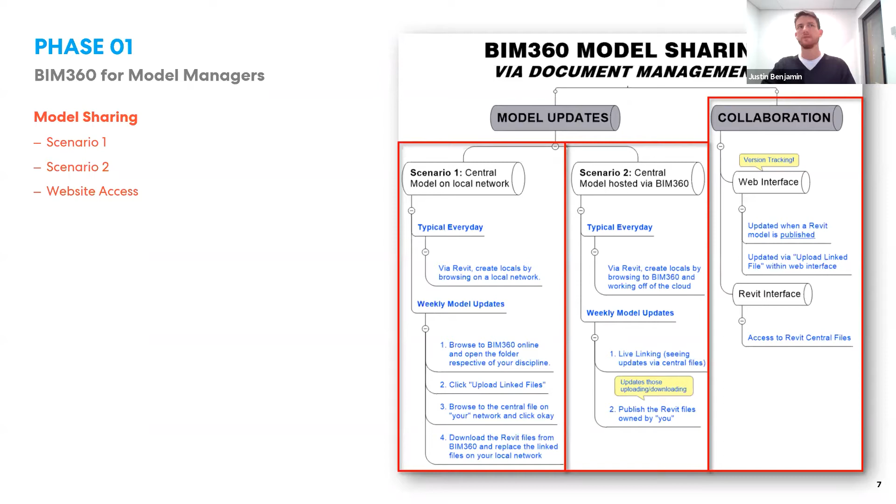Anyway, I got to move on, but there's ample discussion just right here in this window when it comes to the effort it takes to participate in BIM 360 with or without a license. So let's dive deeper: model sharing, accessing the website.

docs.b360.autodesk.com. I think anybody and everybody, even right now, screenshot this. Whether or not you're on a BIM 360 project now, you will likely be on one in the future. And if you are on a project now and you go to this website, you'll see those projects accessible to you. This is a very generic location to BIM 360. Once you sign into this location with your Autodesk credentials, you'll see all the projects that you've been invited to, and you can navigate from that location.

So, look at that. I was invited to some other... there you go. Sorry about that.

So yeah, once you access the website, you shouldn't be overwhelmed. You'll be able to click on the top part of the website. So again, the assumption that you're invited to more than one project, you exit the site first, and then you click on the project that you wish to navigate to.

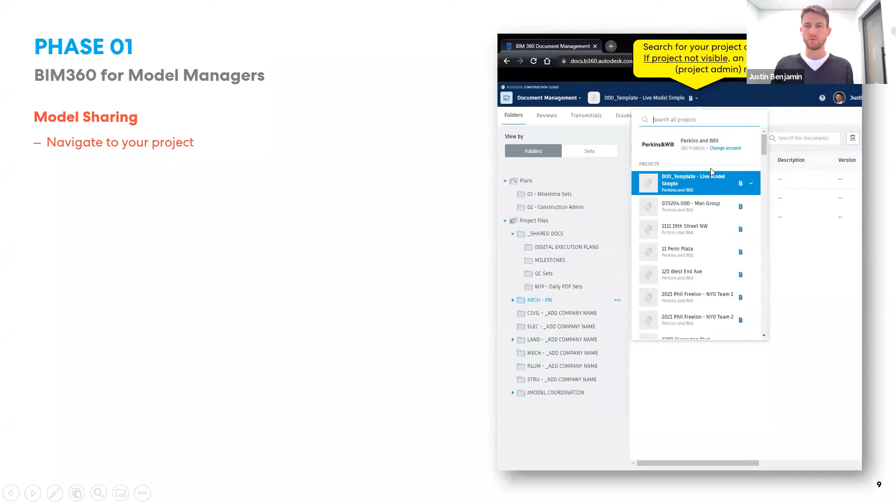Once you click on the project, I'd argue that you want to then select which module you want to access. I'll be focusing exclusively today on 3 modules. And I was told by my boss not to mention some things, when it comes to our subscription versus your subscription, it's really what you want access to.

I would say just make note the document management module is the most critical. So whatever that cost is, you probably want it. The Insight module is, I think, pretty much free, and it's associated to the document management, but I could be wrong, but you might want to make note of that as well as far as the cost impact.

The other module I'll be talking a lot about today is the model coordination module, and I'll say it more than once later on. Those are the three modules that I think you should care about and maybe look into investing in.

To be clear, what I'm not mentioning is the design collaboration module. Write that down, I do not like it, lessons learned. I think that module is a wash, and if it's costly, I say just dismiss it. You can do everything the design collaboration module does manually without the errors, and it's all per user. I'd be game to go deeper as to what I mean by that later on, but don't let them pitch the design collaboration module to you.

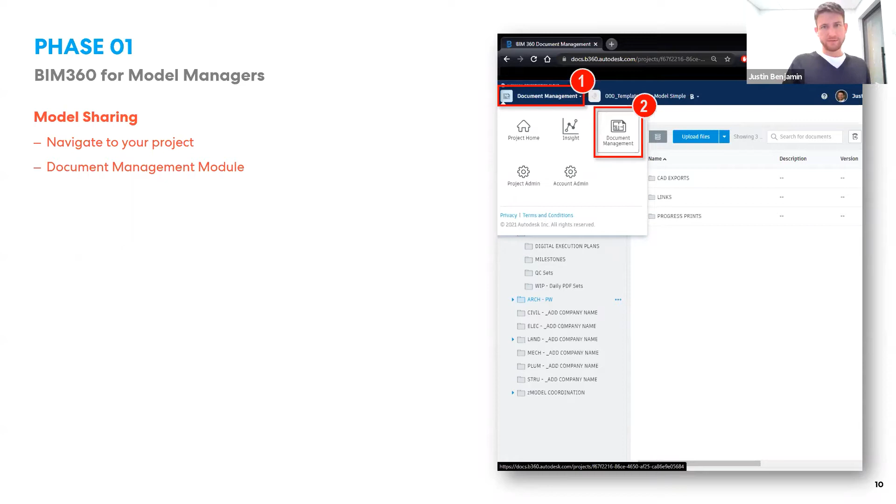Once you're on the document management module, you can have a series of folders. At bare minimum, you're going to have this plans and project files substructure, like Revit categories. You can't rename them, you can't add to them - that's the minimal folder structure of document management. The folders under plans and project files are completely custom to whatever your company wishes to pursue.

For Perkins and Will this is constantly changing. We're evolving, lessons learned as to what we want and how we want to organize content. Under plans, we have a couple of folders ideal for project milestones. They have sets - what a set would be is like PDFs that are sheets common between benchmarks like bid, permit, construction, revision, whatever. You have sets that kind of connect them, so there's this taxonomy that helps you there.

That's plans, but under project files is the beast - that's really where most of the work happens. We have a shared docs folder under project files, which is basically everything but the Revit files. This is where we keep working PDFs. We use Clarity which essentially prints PDFs daily of our content, saving them so people can see what we're working on day-to-day. We also have a BIM execution plan and anything else general to the team or project. Again, this is an FTP site, you're welcome to put whatever you want there.

We also have all of our Revit working models. Every other folder beyond shared docs is specific to the company or discipline - this is where you'd have your live Revit files and any CAD links nested inside of them. There shouldn't be any archives under these locations - again, this is a lesson learned. Under these folders there should just be the live model, so it's very clear this is what I want to link to. Any working or archived model should be saved off the network, off BIM 360, but somewhere else. There's also a model coordination folder I put here, which lends itself to the clash coordination effort, which I'll talk about in a little bit.

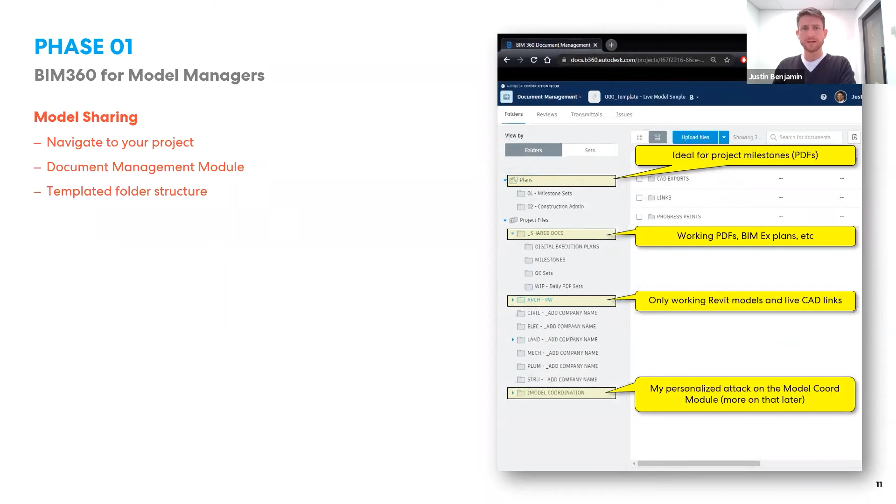Folder permissions - again, this is another lessons learned. Every folder, like project files and shared documents nested within, all have permissions. The way we've learned to do permissions at Perkins and Will is, when it came to company it was obvious - we always assigned the right company when adding a user. When it came to role, we put a lot of time initially into identifying electrical engineer, structural engineer, mechanical engineer, all these things.

But that was inconsistent. Honestly, the company and role aspect of membership is specific to, or the value there is, as it relates to folder permissions. If you're just adding an electrical engineer because that's who they are, there's no extraction of that person's position as it relates to this project bringing value. You're only really caring about role and company as it relates to folder permissions. So what we've learned at Perkins and Will is to simplify folder permissions to role - as far as I'm concerned, if you're not Perkins and Will, you're a consultant. You could be owner, engineer, CM, I don't care.

You're not Perkins and Will, so you're a consultant. The company assignment is super reliable in that, generally speaking, when somebody adds a team member to the project, they always assign the appropriate company. With that permissioning, you're able to then go into the document management module.

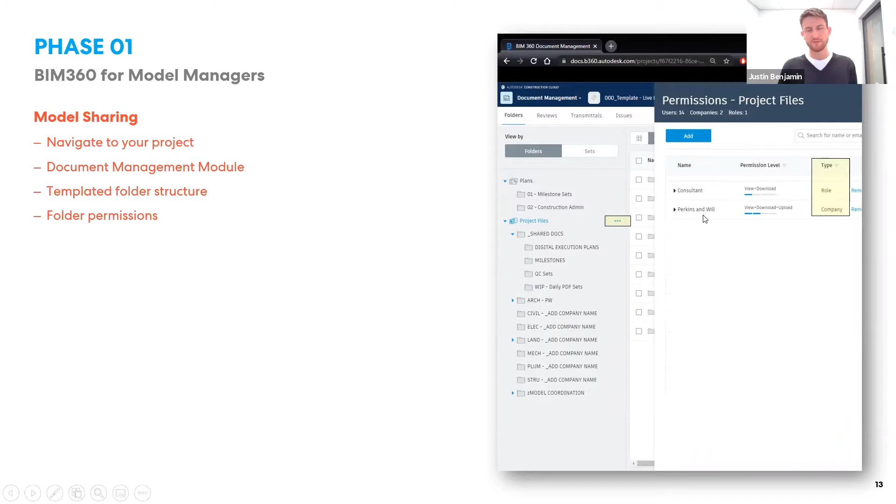So you see me under project files, clicking the three dots. On the top folder here, I've basically said that anybody assigned to consultant can view content and download it, but can't upload or edit. I did assign Perkins Will the company to, because we have the license to actually do a little bit more per folder. But what I also did is that by doing that, that's the project files, not the parent permission.

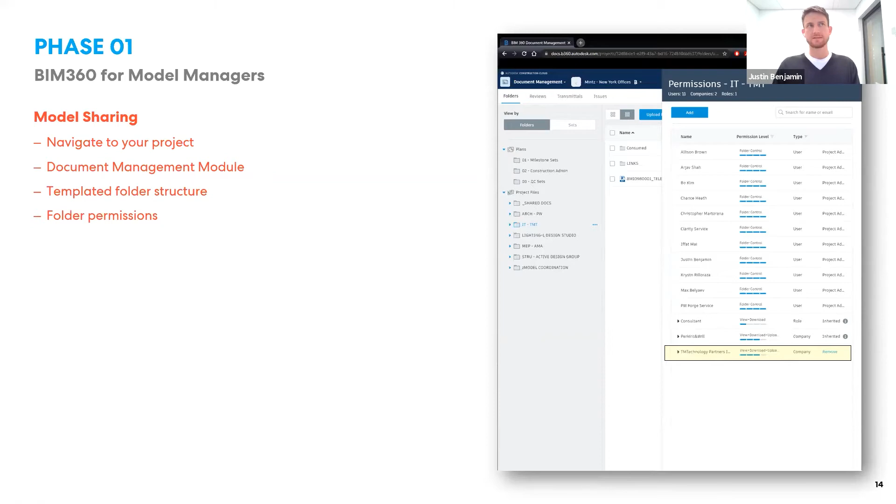Then we go to each folder and we assign that company to have editable rights to that folder. So this way, each folder under project files, its permissions are dictated by the company, much more reliable than the role. Hopefully that makes sense. I'm gonna keep going, but it's pretty important. It was a big lesson learned for us.

If you wish to collaborate your file in BIM 360, the assumption here at this point is that you do have a subscription to BIM 360. It's pretty simple. Oh, I do see some Q&A.

I'll tell you what, only because I fear that I'm going to get behind, I'm going to go back to the Q&A in a little bit, okay? But I love the questions.

Keep posting them. When it comes to pushing your file onto BIM 360, in the past, people have been doing like a save-as environment. You open your file, you start with a template specific to your firm, you save it to your local area network, like the P drive or whatever. In this case, all we're asking you to do is, instead of saving it locally, go to the Collaborate ribbon.

Click Collaborate in Cloud, and with the assumption the project's already been created on BIM 360, which is done by your project or studio admin, you just browse to your project and save it in the respective folder. Super simple. So instead of save as, you say Collaborate in Cloud, boom, done.

The next window is publish sets. This is the most underutilized function, I think, that we've got going on for us that we really want to make note of. So when you publish a file, that's what you see on BIM 360. I'm going to show in a little bit, me going to the website and accessing the content, the file via BIM 360.

When you click on the Revit file via BIM 360, you only see the views that have been associated as published sets. So if I don't assign a published set, but rather just save and collaborate my file in BIM 360 and do nothing else, I'll just see some default axon that can orbit or rotate, but I have no control over phasing, design options, the shot or perspective. I certainly am not seeing any of the sheets, I'm not seeing any of these specific things that I might see value in.

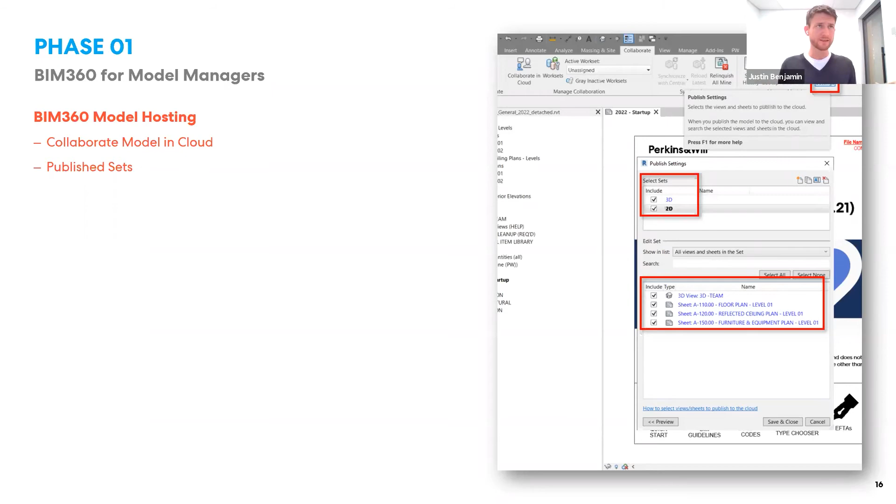Those are sheet sets. So for the same difference, you create a new sheet set, call it 2D, and assign some core sheets that you might want to see when you select that file when you go to BIM 360. Same thing for 3D views, and you'll see what that value is in a second. If you collaborate your file successfully, and then go to the BIM 360 website and access the ARC folder and click on the Revit model, unlike any other FTP site like Box or whatever, you're actually now immersed inside the model.

So when I click on the model, notice how now I'm looking at this 3D series of views. Sure enough, the team in this particular project created some camera shots called entrance, medium conference, office print, office storage, pantry, etc. Could be axons, could be perspectives. They assigned a published set to those 3D views so that when it's collaborated, you could cycle between those.

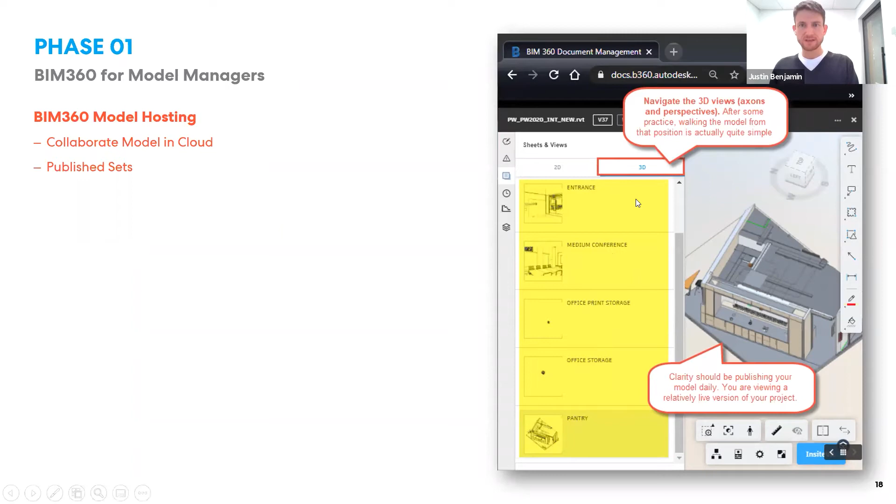They did the same thing for 2D views. Now, I want to be very, very clear when it comes to these 2D views - these are not the same thing as PDFs. They look like the same thing as PDFs in the sense that you're seeing a sheet, you're seeing a title block, you're seeing the view inside of it.

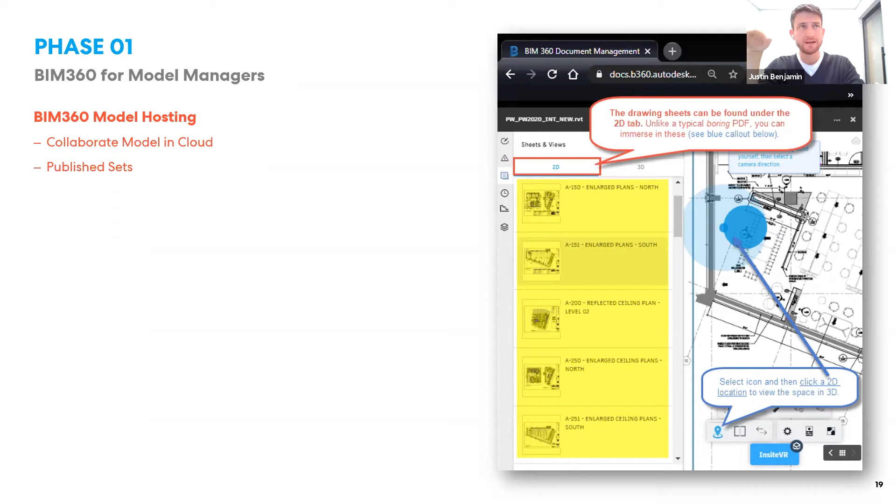But unlike a PDF, you can click on this Place Me feature, which is what I'm highlighting in the bottom center of the screenshot. You say Place Me, and you can select anywhere in the plan, click a direction, and all of a sudden you're immersed in that direction. And now you're looking at these PDFs, and it's no longer this two-dimensional world, but rather now you're able to walk it. You're able to navigate through that pantry, see what's going on. There's no limitation. You can look behind you, you can look forward, you can walk, you can look around.

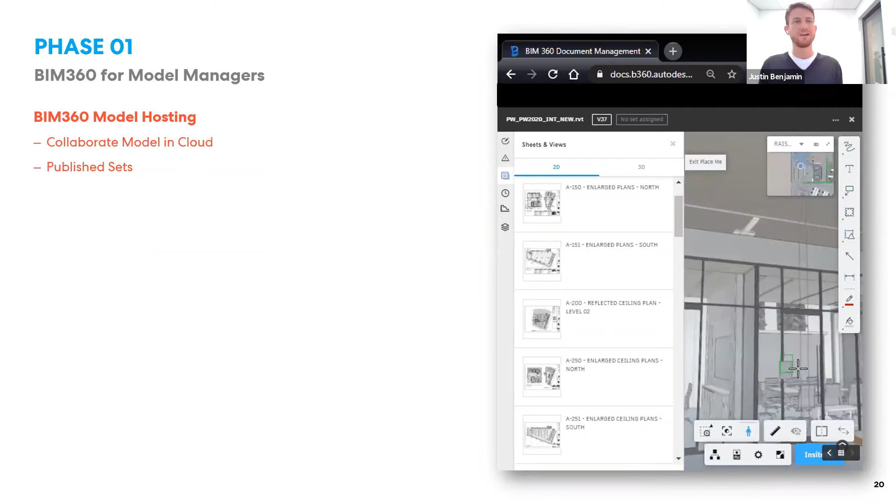It's all super great. Now, when you're done looking around, you can click to exit. Before I go too crazy and leave what it's like to have published sets, I should give you a disclaimer. This again was a lessons learned.

The fewer the views associated to published sets, the better. So I had some staff like, oh my golly, I'm going to go ahead and assign my entire permit set. I no longer care about PDFs. I'm just going to use my Revit model with my published sets as my method of looking at my updated sheets, because I have two separate avenues for content. The challenge there is that the more views assigned to a published set, the longer it takes to publish.

So to publish to whatever you're looking at on Revit, on BIM 360, that website, you're looking at the published model. So let's just say it's 12 o'clock and you have a meeting at 1 o'clock, and oh golly, I need to have the latest updates that I did at 11:30 accessible to me at 1 o'clock for this meeting with a client, and I want to navigate that content via this website. Well, publishing shouldn't really take that long depending on the size of the file, but it will absolutely take longer if you have a lot of views and sheets assigned to the published set.

So definitely have all the necessary views associated to published set that you want, but just know that if you're having just details and other discipline sheets just for the sake of having them assigned to published sets, it's going to take longer to publish and it's going to hurt you. I've seen it take upwards around 2, 3, 4 hours for like 200 sheets of content. So it's best to have just what you need with your base plans, your base 3D views, have those as published sets, and rely on PDFs to properly navigate.

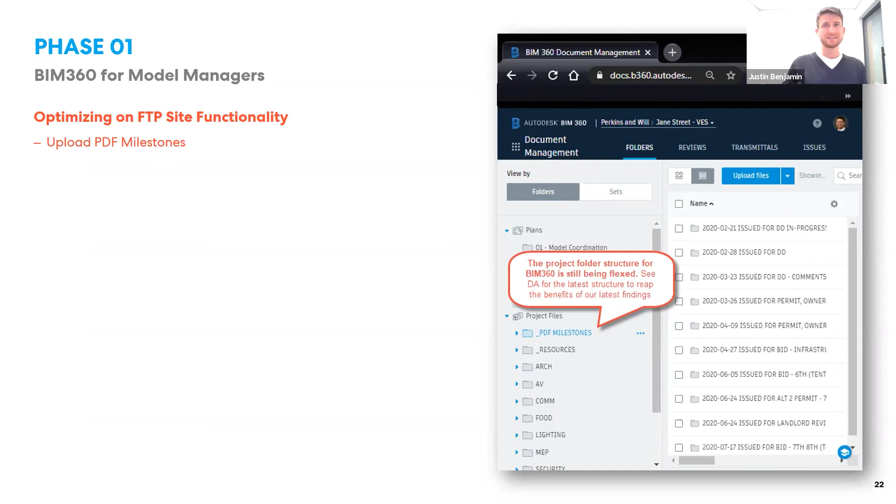Having said that, I do have a folder under shared docs that would hold all my PDFs and staff can navigate them just fine. They just can't immerse inside of them. Again, under shared docs, we have everything from execution plans, meeting minutes. You can put anything you want there. In fact, what I found out recently, and I don't think that we're limited to what I'm about to share...

What I found out recently is that you can open up a PDF and add comments and callouts. You can also open up a Word doc, and just like if opening it off a SharePoint, it'd be live and you can edit it simultaneously with multi-users. Other file formats are also becoming available, but for example, Excel files you can access. If you were to open up a file from Excel off of BIM 360, it would launch a static version of it on your desktop. But I tend to think more and more interoperability is coming its way.

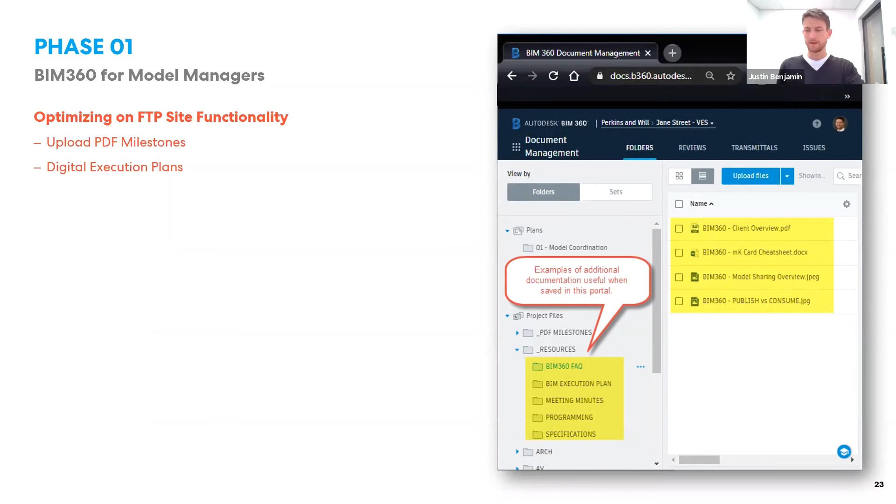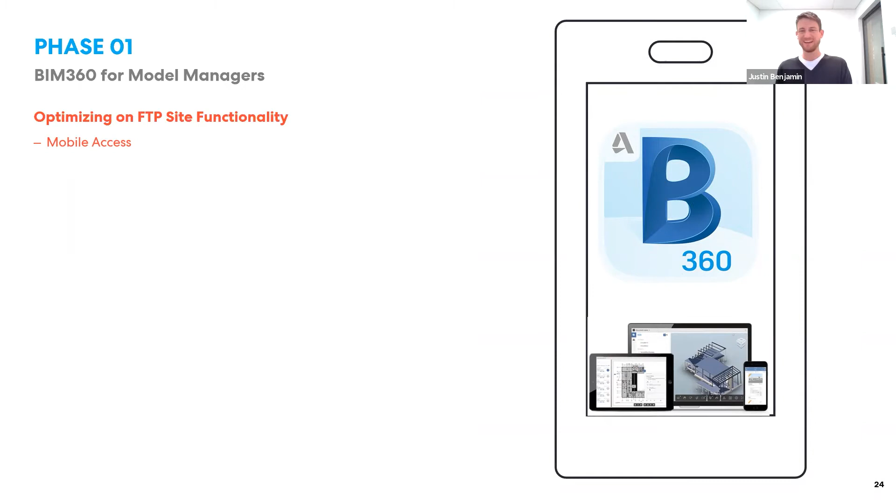Everything I'm talking about when it comes to website access is also available via mobile access. So if you have an iPhone or Android - apparently according to my boss, I'm using an icon that reflects iPhone 2, pretty sure, I don't know what version that would be - but basically what I'm trying to show is one's ability to open up the BIM 360 app off your mobile device, navigate to your project, which is I'm doing right now. So let it search in the project. I'm going to open up its documents in a second.

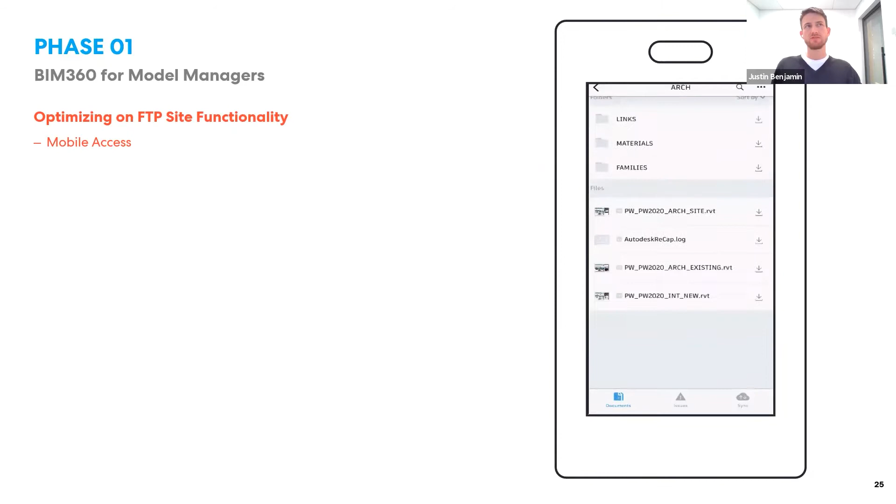Watch this GIF play. Select the Revit file. Once inside, I can cycle between sheets or views, as I suggested earlier, and just navigate on the phone.

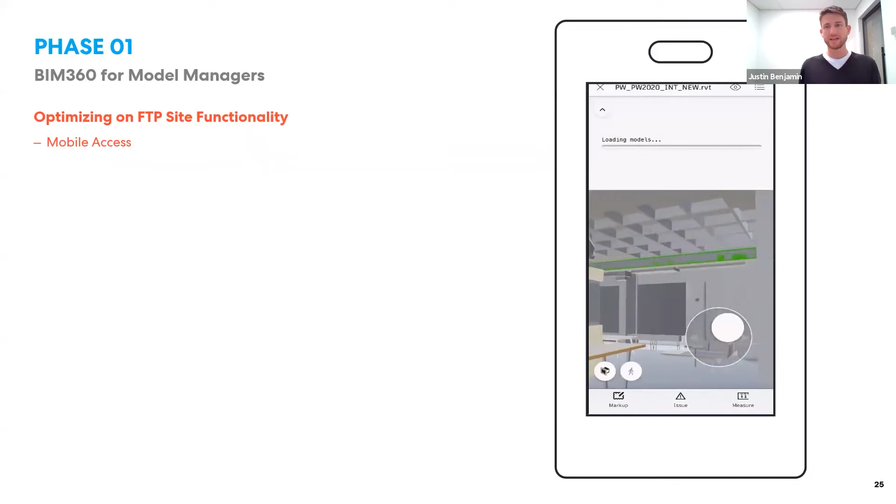I want to be very clear, I'm not a gamer. No, I'm not. Having said that, I'm able to navigate pretty easily on my phone.

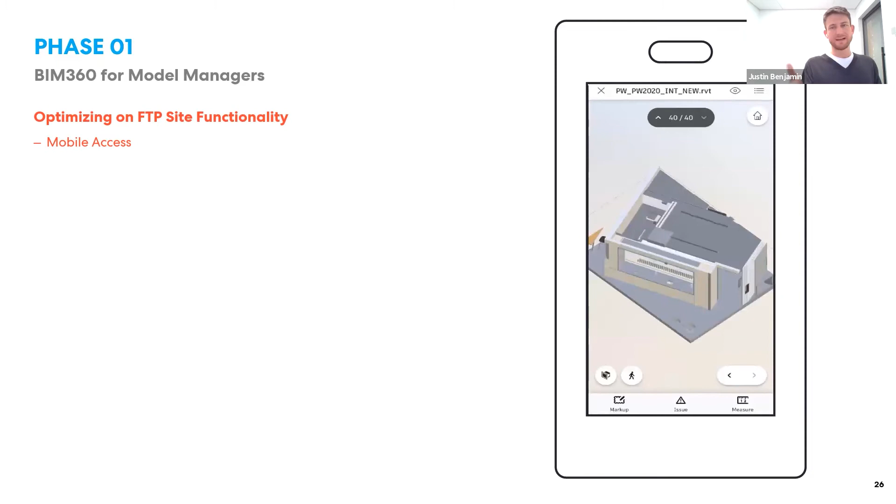In fact, I think in a moment I'm showing an Axon. Yeah, I can spin it, rotate it. Think about all those cut up sectioned views you want to show a client, get their insight on in that moment, or even for a presentation, how great this would be as a resource. And it's all right there, live, linked to your model, no effort. So as long as you're publishing in a regular way.

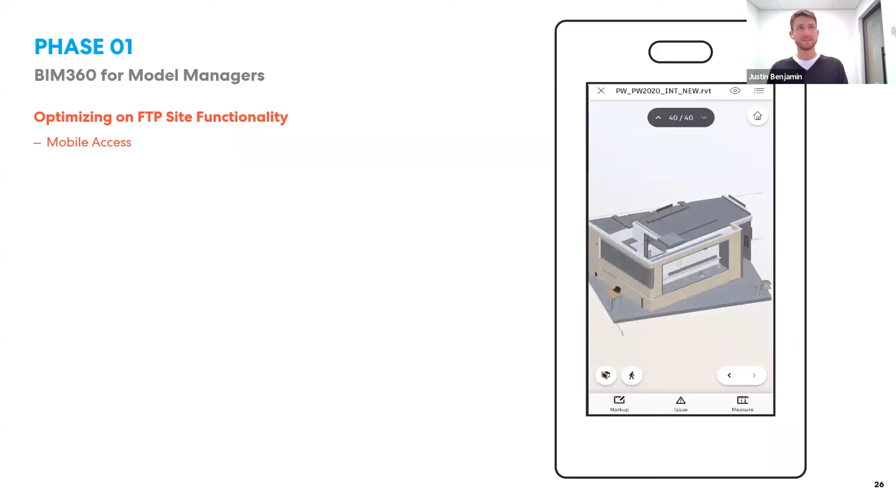When hosting Revit models in BIM 360 - PW is Perkins and Will - hosting your model there would just mean there should be no files on your network. That's very important if you want to benefit from how fast it is to open up a file off of BIM 360. You'd do so without any files, without having your Revit model looking to the network at all when it comes to that link content.

So anyway, I got to keep working. I just realized how far I am - 12:37. I got to keep moving.

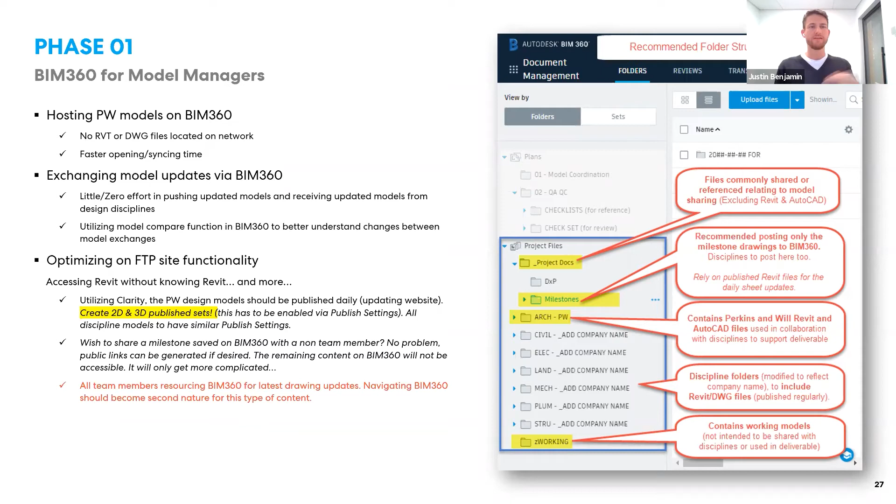Let's go faster. So exchanging models, there's little to zero effort when it comes to pushing updated models and receiving updated models from disciplines. I think this is all obvious, we talked about this to no end. I'm going to keep going. Let's keep going.

So is it worth it? The innovation here is the objectives with model sharing - there should be no effort once it's posted. Model hosting is just migrating off the network, and there's very little effort to do that. You're collaborating your model off the network and optimizing functionality, immersing yourself into 2D sheets, being able to access that model without opening up Revit. It's less than an hour worth of effort per project to take advantage of this module. I'm pretty sure it's awesome.

Project architects, let's go. Okay, the innovation here is utilizing the BIM 360 model coordination module, really trying to simplify the process of clash detection. In the past, we've used Navisworks and other resources to take our Revit models, our 3D models, and filter them through some other platform to generate clashes, create issues, and somehow assign these issues to staff or other design team members so they ultimately satisfy those issues, and then hopefully send updated models.

And this whole exhaustive effort almost required a third party just to manage it. If you're already hosting your geometry on BIM 360, you can almost just click a button and benefit from clash detection. So yes, for the objectives, we're going to use clash detection - just why not? It's there now. I think that beyond clash detection, all issues concerning the model, even out of a clash, can benefit from BIM 360, and even the technical review process.

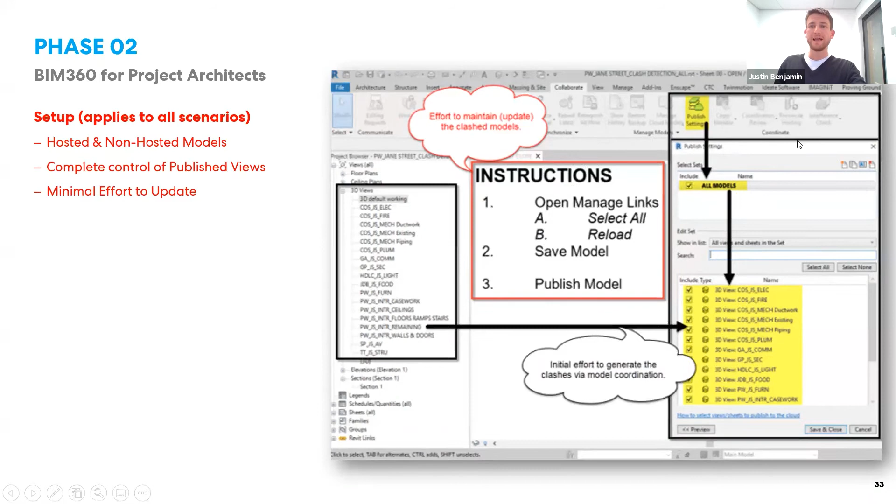And then I created 3D views that isolate that link and the content specific to that link that I'd like to clash against. And then I created a published set that looks at those 3D views. And that's what's clever about this, right?

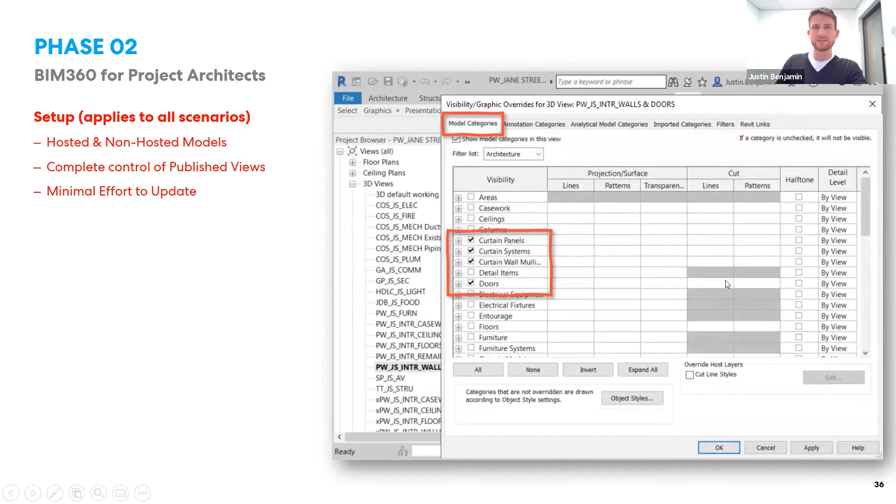So if you go into any one of my 3D views, like this, in this case it's the Perkins and Will model I'm linking to, and I'm isolating walls and doors. And all that really looks at is I've clicked the visibility graphics for that 3D view. I've isolated this link, and then I've isolated that category, that series of categories. And as a result, that's what that view holds on to, and that's what I can clash against.

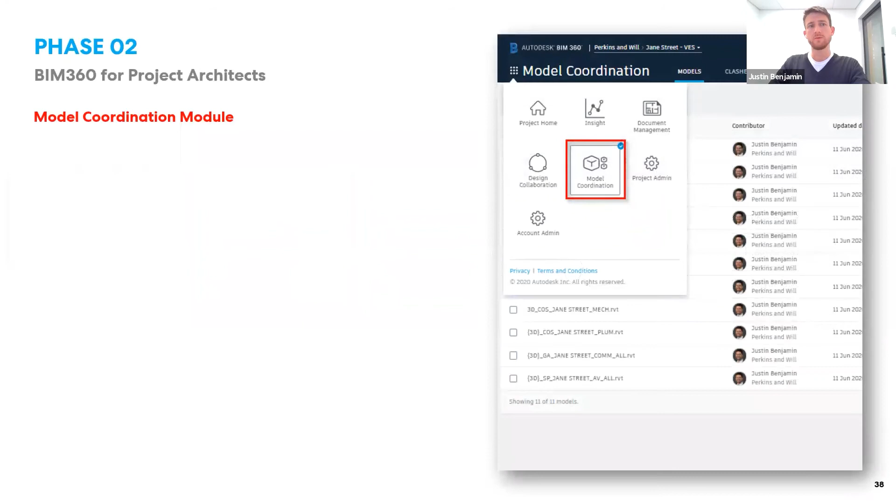So now it's about, now that we have these models, these 3D views that are now being ported to the model coordination module, it's about accessing that clash. And what that looks like is going to the model coordination module, right? There are 3 ways you'll view clashes in model coordination. There's models, clashes, and views, as you can see on the top here.

If you click on models, you can just pick any series of models. And so looking at this list, you're looking at every 3D view that I created in that clash model. Ever since this particular project launched, we've customized our naming convention so that it wasn't so long. You don't really have a lot of control over how model coordination interprets your 3D views.

The fewer the words when it comes to each 3D view, all the better, and even the name of the model — so that this is not as overwhelming as something like 'COS_JS_ELEC_PW_Jane Street_clash detection.' That's just too much. So you can simplify that quite a bit.

Under the models tab, you can select a series of models and just say view, and as a result you'll see all the clashes amongst those models. You can also go to the clashes tab and see each model clashing with one other model, then select that cube, whether it's 5 clashes or 50 clashes, and see those specific clashes between those two conflicting models.

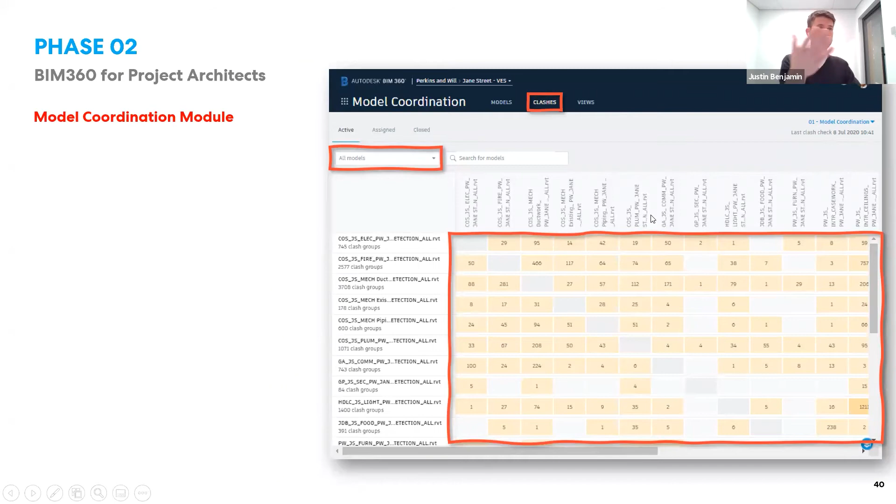You can also go to the views tab, which is basically a pre-selected series of models you can click on — almost like the models tab, but without having to check the models manually. I'm going to keep burning through it because I know I only have 15 minutes left.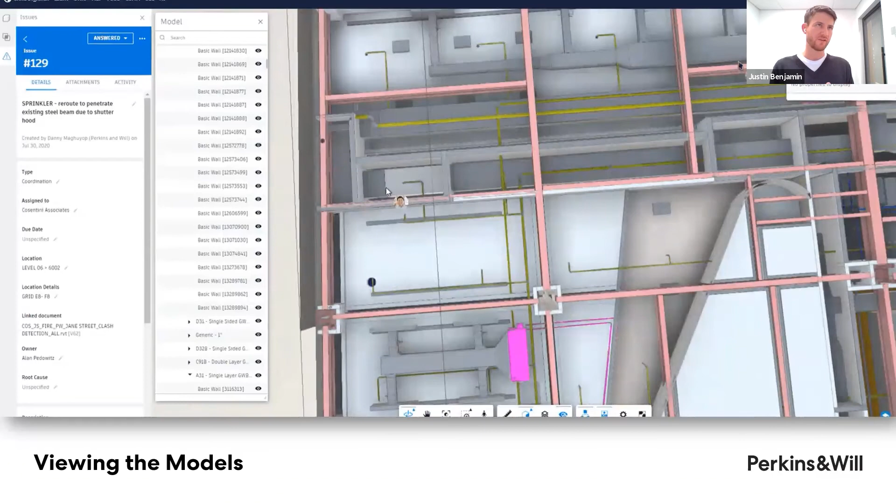Once you select that series of models, you'll immediately be immersed inside a 3D web interface view where you can navigate your project. This is so much lighter and easier to navigate than opening up a Revit model and trying to navigate in 3D there — that's going to be lagging. This is a lot faster.

You can see in this case Danny is navigating the model, trying to break down exactly where issues are. Each one of those circles in blue and yellow represents a different issue. We'll talk about them right now.

Actually, before we talk about them, let's cover navigating the models. When you navigate models, you really have three tiers of navigation. Basic navigation would be just looking at the model, clicking on things like section cutting — you can cut the model up or down, which makes it very easy to see what's going on.

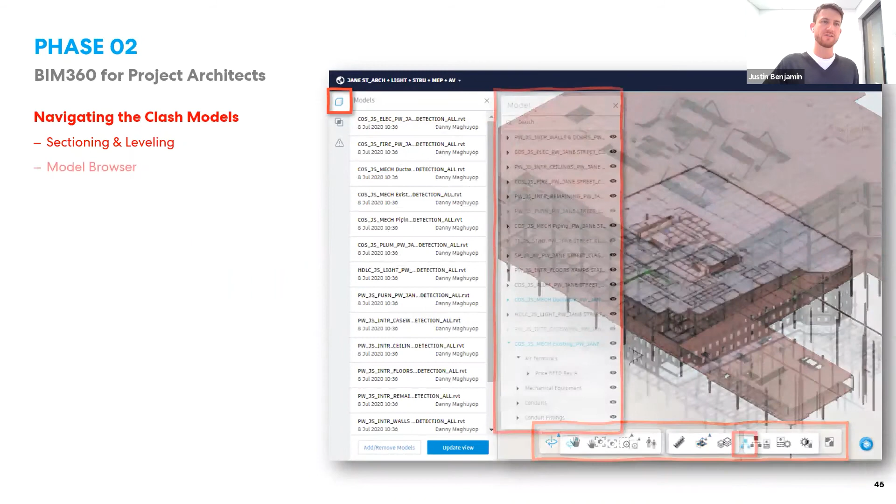With the sense of time, I'm going to burn through this — I've already talked too much, I only have 14 minutes left. Just know that it's pretty easy to navigate models. You can section level them, you can browse, and you can turn models on and off, much like you do in Navisworks.

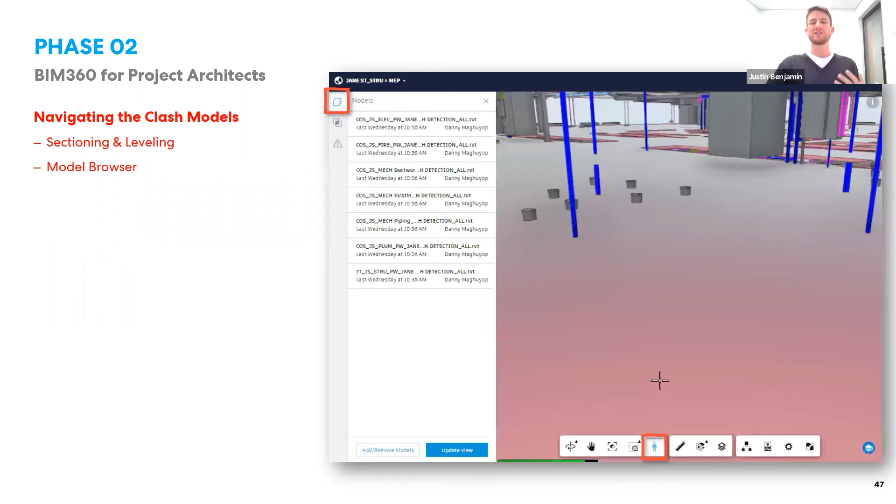You can even immerse yourself in the file, which is pretty cool. You can actually zoom in and activate gravity, then walk the file as though you were a person and look around at those clashes that way. It's pretty awesome. All right, so then creating issues.

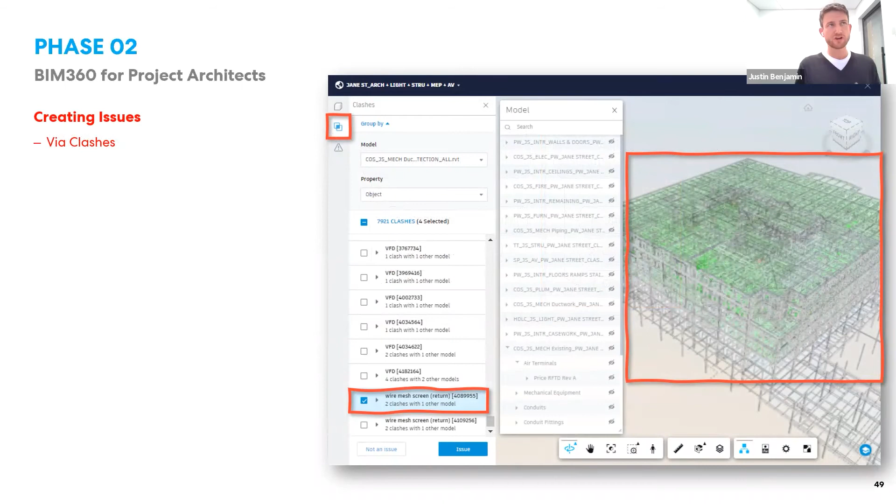You have to understand that when it comes to clashes in Revit, there could be upwards of around 10,000 clashes on any project — tens of thousands of clashes. And mind you, the tolerances are so rigid.

Even though you can now acknowledge some tolerance in model coordination — like for piping, you can say if it's not clashing within 2 inches, ignore it — you have to imagine you probably still have a lot of clashes to deal with. If that's the case, you just acknowledge the clashes you care about by assigning them to issues.

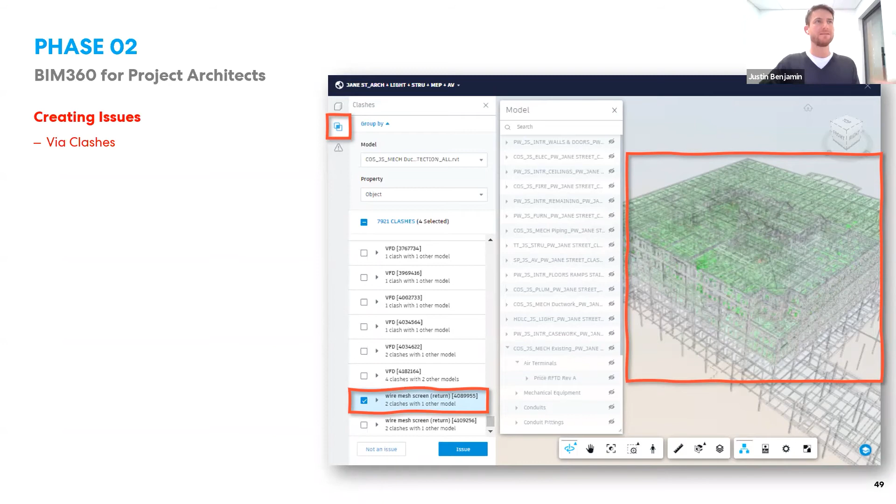So you cycle through the clashes, click on the issue button, and out of 1,000 clashes, maybe you only end up with 100 issues. As you can see here, that's what I'm doing — I've clicked on the clash, acknowledged it as an issue, and said 'create issue,' so be it, it creates an issue.

You can also look at any PDF or 3D view — it doesn't have to be specific to model coordination. You can look at a PDF in document management, or click a Revit file in document management, look at a perspective, and see an issue. In every one of these environments, you always have this little emergency icon with a triangle around it.

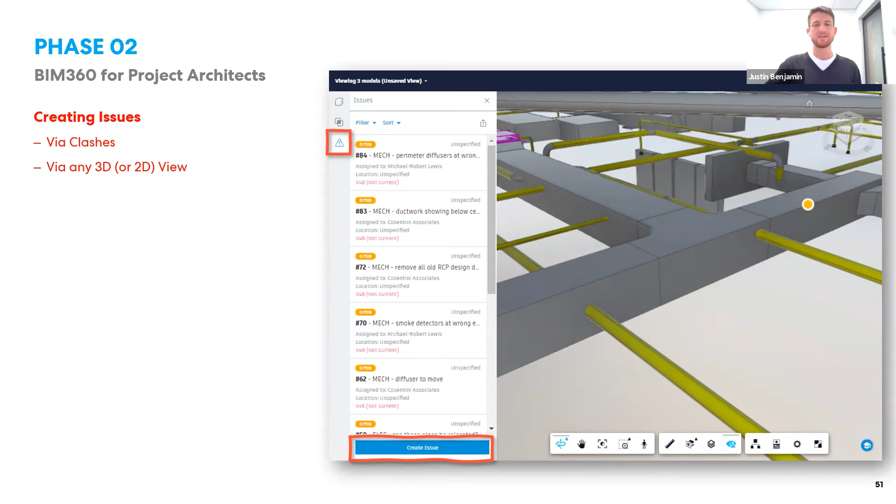You click on that and you can say acknowledge issue. All these issues — whether created through model coordination, PDFs, or 3D views — all go to the same bucket of issues later on that you can easily navigate to. So you can create an issue in any of these scenarios.

Once you create all these issues, you're welcome to go to the issue module — I'm sorry, the document management module, under issues — and you can see all the issues created no matter what platform they were created in. You can also create a brand new issue via the document management module, which has no context at all.

So maybe instead of creating an email, you just want to think about something and share with a client or discipline later on, and create an issue. It's totally arbitrary - you type in what type of issue it might be, and so forth.

When it comes to issue accountability, that's all about project management. I tend to think that lends itself to the last phase, but you don't have to fully go into project management to still benefit from issue collaboration. I have to keep going quickly because I want to give some time for questions.

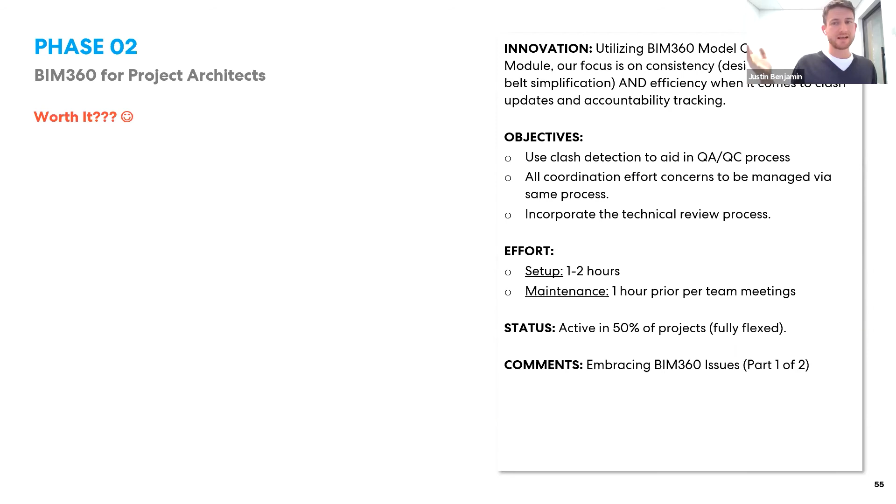So, project architects, is it worth it? Once your file is hosted on BIM 360 or even uploaded, it takes less than an hour to do clash detection on a weekly basis. It's crazy not to benefit from that. Even if half the clashes are a wash, you can easily sort and filter them down to find the most beneficial clashes to acknowledge well before construction. The maintenance and effort is minimal - it's crazy not to take advantage. Project managers, let's keep going.

So the innovation here is cross-module functionality. You're no longer caring whether it's in document management that you're creating an issue, or clash detection you're creating an issue, or whatever. For project management, I think the value is in using the Insight module.

Again, I believe that's a free module. It looks at the project in its entirety and all the issues in their entirety, and helps you create action items. So instead of creating an agenda via a Word document before a meeting saying 'we should talk about these things,' let's go live, filter the issues that are still open, sort by discipline, and talk about it that way. Maybe that's a little more constructive.

You can close issues in that moment, just the same. I think the setup is less than an hour and maintenance is fully automated - there's no maintenance at all. So yeah, let's keep going.

Again, the goal here is to simplify meeting preparation and conversation and ensure accountability on project tasks. That's another great thing about using issues in BIM 360 - accountability is a guarantee, there's no forgetting that an email passed you later on.

So we've talked about all the other project workflows when it comes to creating issues - now it's all about issue accountability. You can filter it live. On the document management module, go to the issues tab, and using the left-hand side, click filter to isolate categories of issues - whether associated to clashes, coordination, or whatever. You can then filter to only look at opened ones or answered ones you want to confirm, and then select the issue on the right-hand side.

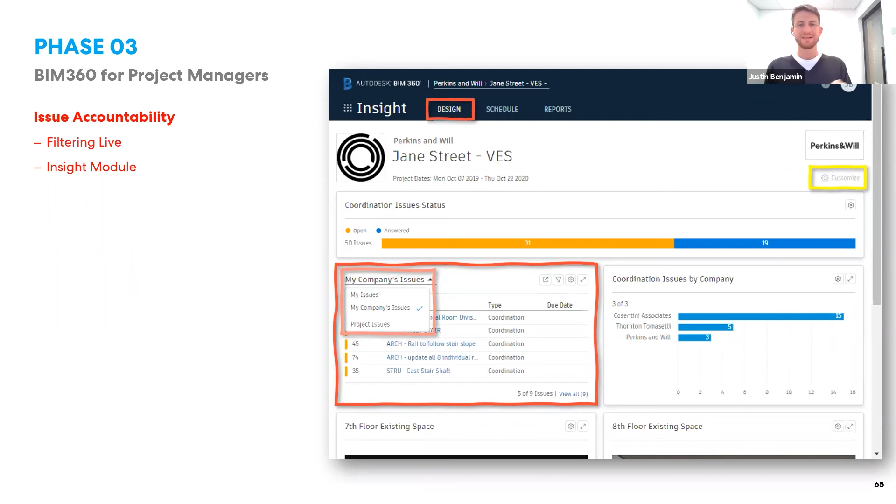You could also - what we've done in the past - create reports scheduled to be sent to, say, each discipline every Monday, two days prior to a weekly meeting.

Oops, a daisy. Oops, wow, I went right to the end there, didn't I? Look at that, so excited. Couldn't do that - golly, let's keep going. Almost at the end, I know we're excited, at least I am. Come on. Oh no.

When you issue a report, a PDF is sent every Monday morning, isolating the live issues specific to that discipline. They can click on the links associated with those issues, taking them to the actual issue where they can comment on it. The idea is giving them a couple of days prior to the weekly meeting to solve the issue.

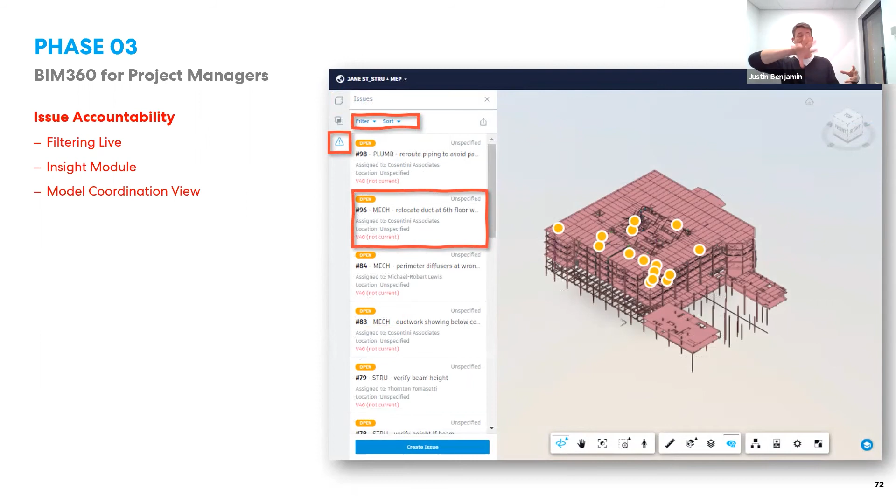Model coordination view, going to the views, every time you access a model it will show any live issue associated with that model, which is pretty cool. Whether I'm looking at model coordination or a Revit model, if I go to issues, it will tell me whether it's linked via model coordination or any other 3D view. It will say somebody has a problem with this project, this file, the specific element, that you can address at that moment.

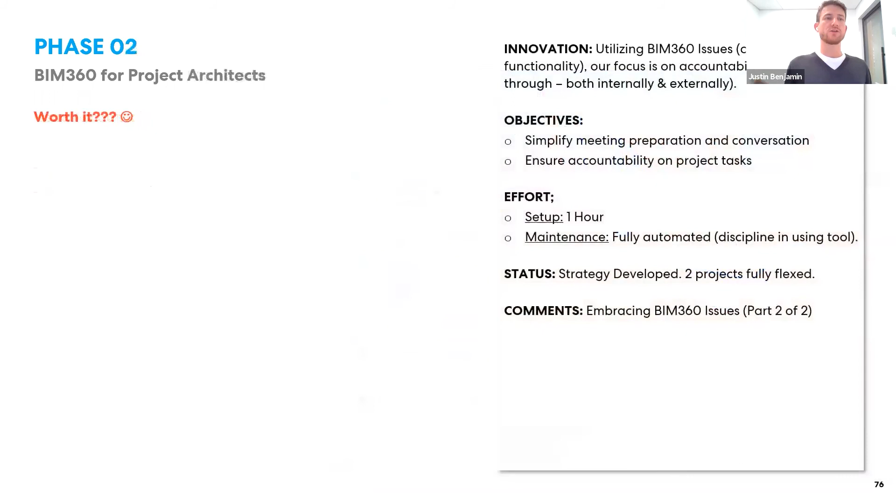I'm going to burn right through it. Looks like this, it's all good stuff. The whole goal for project management is can I remove the need for meeting minutes and agendas, letting all your action items feed through issues, so you're not arbitrarily coming up with a meeting agenda and issuing action items afterwards. All the action items are live, through the insight, through issues, and I think it can hopefully streamline all that.

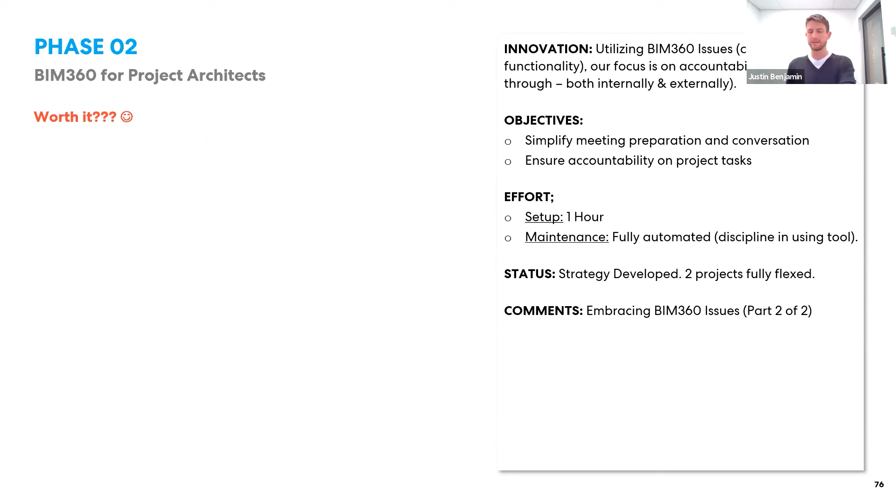My immediate focus was on efficiency, minimizing the time and effort in design collaboration, and I'm pretty sure we've done that. Consistency, design application, tool belt simplification.

All that really means is removing other applications like Navisworks and relying on, hey, if you're already on BIM 360, do Clash on BIM 360. The accountability - there are many different ways to respond to an issue, and they all go the same way on BIM 360, it's a guarantee. You're not using Teams messaging or Skype or Outlook, all these other things. You're just using one portal that notifies all those other portals when there's a concern.

Fun little anecdote there. And the phase breakdown - hopefully what you picked up from this is that if you do phase 1, then 2, then 3, they're all digestible. You're kind of building upon the previous phase.